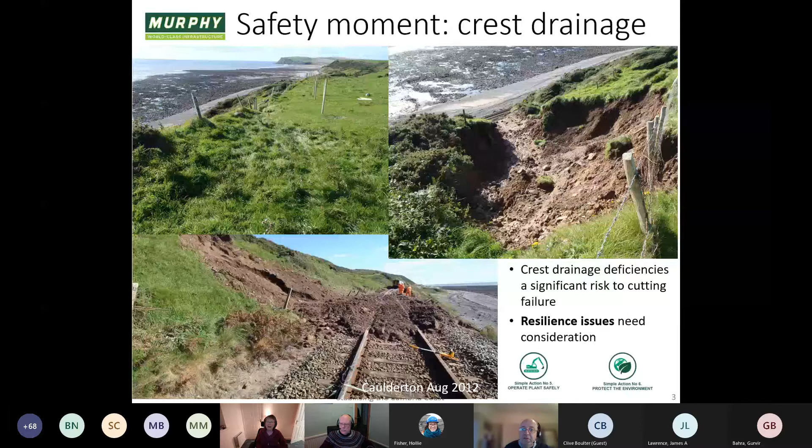So the Cumbria Coastline, as its name suggests, runs along the west coast of Cumbria. I actually live down here in Arnside, so I see the trains going past pretty much every day. It opened quite early in the history of railways, 1837. And the reason for that is because this area of the world is actually pretty remote, unsurprisingly, but it's remote even in Lake District terms. There aren't really any routes across the country that are substantial routes. So the only real route round this part of Cumbria is round the edge, so either by road or in those days by rail.

It was built primarily to support the industry at that time, so coal, iron ore, steel, chemicals, which were big industries. The port of Barrow was the largest exporter of iron ore for a long period of time in Victorian times, so it was a big industry. Obviously, that has declined significantly since then, though there are plans afoot to start coal mining again, with a lot of the coal working actually extended out under the sea. And then lately, there's been a nuclear industry at Sellafield, so the railway line is used for waste trains and also significantly for transporting workers from Barrow up to Sellafield, and likewise for transport for the nuclear shipyards.

Having two routes to get in and out of Sellafield and Barrow is strategic, and it's one of the reasons why the line is maintained, though obviously also to provide a link to what are otherwise quite remote parts of the world. There's only about 9 or 10 trains running a day from Carlisle to Barrow, with some going into intermediate stations, and consequently it's a single bi-directional line in parts. It was once twin track all the way, and it's pretty low speed, which helps in some ways for working on the railway, but there are many other challenges, as you can see.

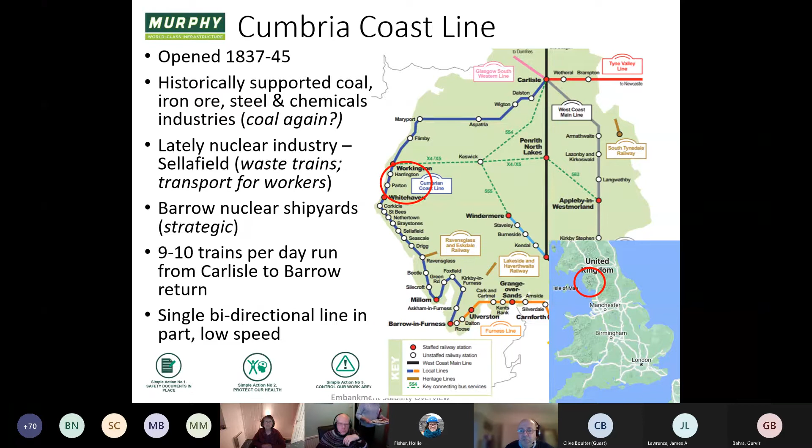So this area up here, Harrington Parton, is sort of the area which we're going to slightly concentrate on today. There have been works all the way along this line, and you'll see examples from other areas, but just bear in mind it's primarily that part of the world we're talking about.

So when you look at... can somebody mute themselves? There's a bit of cluttering around. Sorry.

When we look at the coast today, we can see that there is a legacy of past industry, but it isn't at all obvious. So if you look at the village of Parton down here, it doesn't look like an industrial area at all. In fact, this area here is a huge coal tip, but you wouldn't really know that when you look at it. And now there is the future of what's described as the energy coast, so you can see wind turbines and nuclear, obviously. But it remains its own place, and there are certainly very odd features about it that you don't see anywhere else.

So these houses, and there are several of them, lots of them, are literally built on the shore, and people live there. These aren't holiday homes, people are living there all year. And where this track is here, that is the route by which you drive to your property.

You have to have a 4-wheel drive. In fact, when we were there, somebody got stuck and we had to pull them out. So it's quite an unusual place.

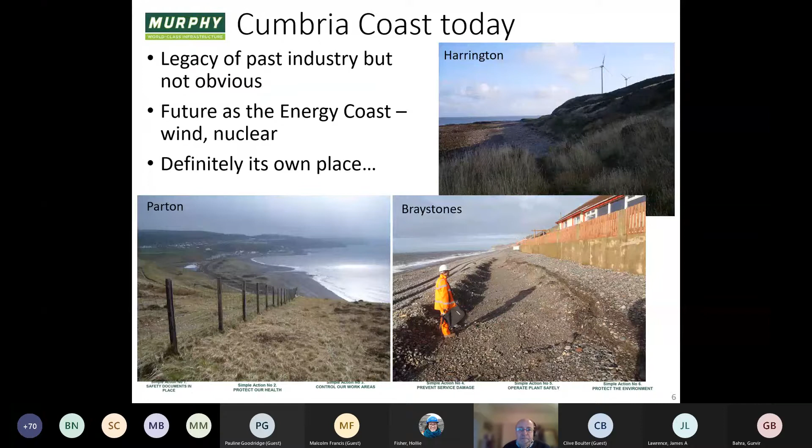As a consequence, there are lots of challenges. One of the obvious ones is nature. The Irish Sea is a very exposed coastline. You wouldn't necessarily think it—you think, well, it's not the North Sea, it's not the Atlantic, but it's incredibly exposed up there. These shots, when I was going through, it was quite difficult to find times when it wasn't pouring with rain, and the camera shots were smeared with water on the lens, etc.

Obviously I was going up there during times when the weather was poor because of emergency works. But these are all examples of things that happened in a single month—in a very short space of time, a big storm. We've got major collapses and damage to sea walls, washout events. This is actually a rock slope, but nevertheless, washout events affecting the line. You'll see examples further on where basically a seawall collapsed and took away the railway line.

This is an example of one of these houses we were talking about. I'd been speaking to the owners a few weeks before, talking about whether they were concerned about the fact that storms could come up and damage their property, and they had said, 'Oh no, it never happens, we've never had any issues with the weather.' Well, obviously that wasn't quite the case.

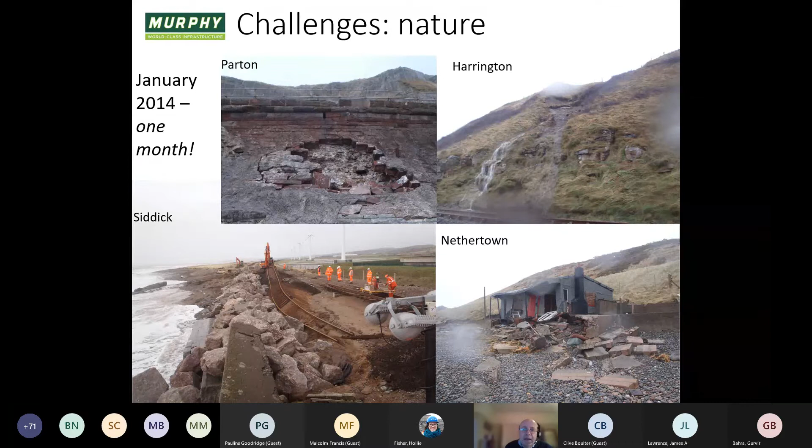Then there's the broader environmental issues. It's obviously an environmentally sensitive area. There are SSSIs, there are Ramsar sites, there are dunes, and consequently natterjack toads associated with those, and shore nesting birds. There are protected marine habitats, soft corals just in shallow depth, protected fisheries, and multiple consents with marine organisations to do any works on the foreshore. And there are multiple landowners, including the Crown.

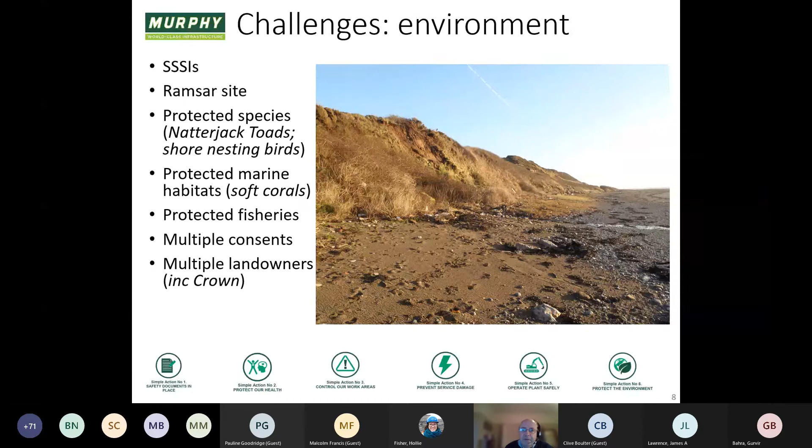So it's tricky to organise works from that perspective. The location itself is obviously pretty challenging. It's a railway environment, so as anyone who works on a railway knows, that's not easy to organise—there's lots of rules and regulations we have to follow for safe working. It's a foreshore environment, so there is tidal working. You can see some guys working there—this is a culvert job—and you've got to work around the tides and make sure you can work safely, which is tricky. It's very exposed, so when the weather gets bad, you literally can't work sometimes because of the amount of water and wind.

And it's remote. There is no practical road access to most places, so a lot of places you're either having to come along the line, or if you're lucky there might be an access track along the railway line, or you're coming along the foreshore. There are sea walls you've got to get over and deal with, and there are not necessarily good access points to the railway where you can get vehicles on and off. Signals are quite remote because they don't need many, in some cases bi-directional lines, and there's a lack of mobile coverage. So trying to organise yourself around all those is difficult.

And then there's the asset condition. The railway line, as you can see there, was built on the easiest place to build it, which was basically along the top of the foreshore at the bottom of these sea cliffs. It seemed like the best option at the time. And remember, like a lot of railway lines, it was built purely for economic purposes—it wasn't built to be there in 100 years' time, it was built to deal with the industrial needs of the time for the next 20, 30 years. And so it's a Victorian asset.

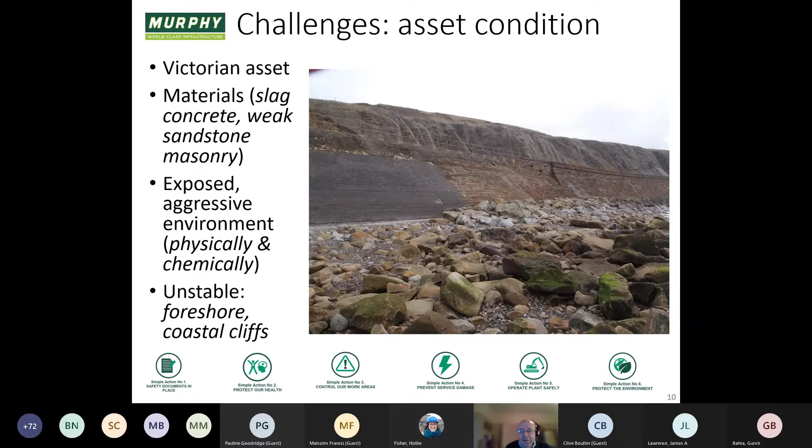The materials that make it aren't great. In places there is slag concrete, which means it's not very durable at all. The masonry, as we'll see later, is a weak sandstone. It's an exposed, very aggressive environment, physically and chemically, so that's not good for any kind of structure. And it's built on very unstable ground—foreshore environment, coastal cliffs—all tricky things, all affecting the asset condition. So just a few examples there.

We can see here, this is slag concrete on the seawall at Siddick, and this is the effect of having slag concrete. It's a storm, it came down, it's unreinforced, very poor condition, it collapsed, and then the railway line was exposed behind it.

A lot of the masonry, most of the masonry, is St Bees sandstone, which we'll talk about in a bit, which is a pretty weak sandstone. It's very convenient to use because it's easy to cut and shape, but it doesn't stand up to the battering of the sea. And as a consequence of that, and as a consequence of the Victorian sort of structure with this skin of masonry, it can easily collapse.

So small cracks, small voids open up. The force of water and the air associated with that being pumped in by the waves basically blows out the front of this masonry facing. So you get some quite dramatic damage to the seawalls, these Victorian seawalls.

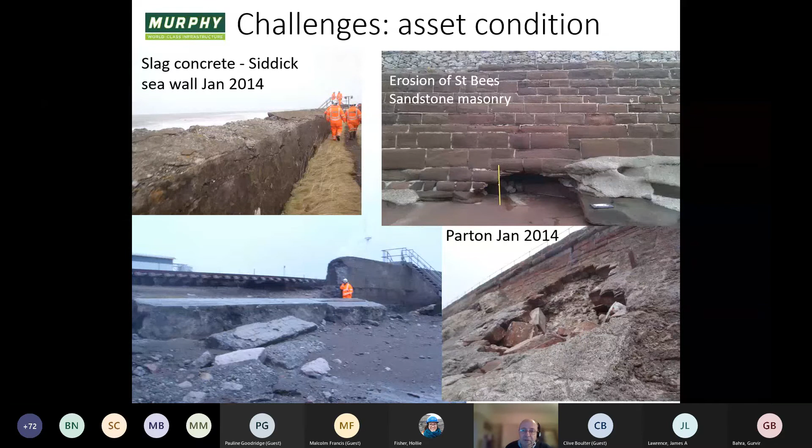So if we come on to the geology, I've chosen intentionally a pretty ye olde map of the geology, but the geology for this talk, for the purpose of this talk, is quite simple. The underlying geology along the coast is basically either coal measures material or St Bees sandstone, Permo-Triassic St Bees sandstone. And neither of those deposits are particularly competent, and that causes a lot of issues.

On top of that, you've got made ground of various types, so slag associated with the steel industry, the iron ore smelting industry, mine spoil, landfill deposits of various descriptions. Then you've got natural drift deposits of beach materials, blown sand, and then glacial deposits, which are basically till, a very sandy till, largely derived from the St Bees sandstone.

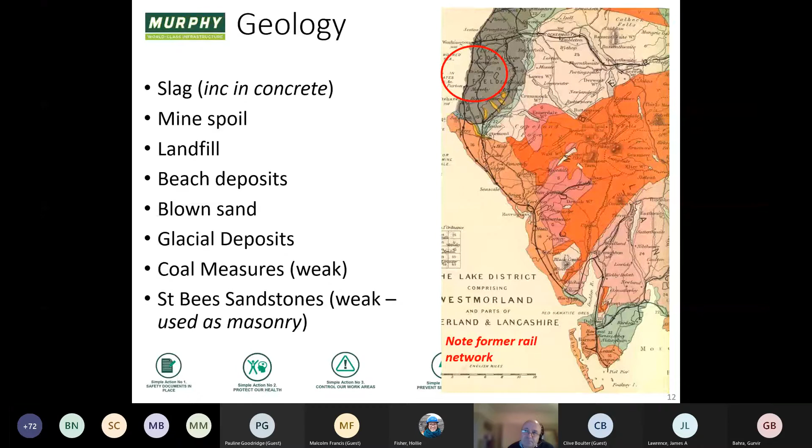Which doesn't help in terms of its ability to resist being washed out. So the coal measures material forms part of the wave cut platform. You can see dipping strata there. There are some quite nice fossils in it, incidentally, because you get some nice calamites fossils which you can see on the beach, plant fossils, which are quite fun to collect.

But from a slope stability point of view, it's not great, because you've either got blocks of sandstone, which can easily ravel out and roll out onto the track, and then you've got this weak, weathered mudstone behind it, which can either ravel off or come down as small translational failures, or sometimes there are deeper slope failures within that weak material.

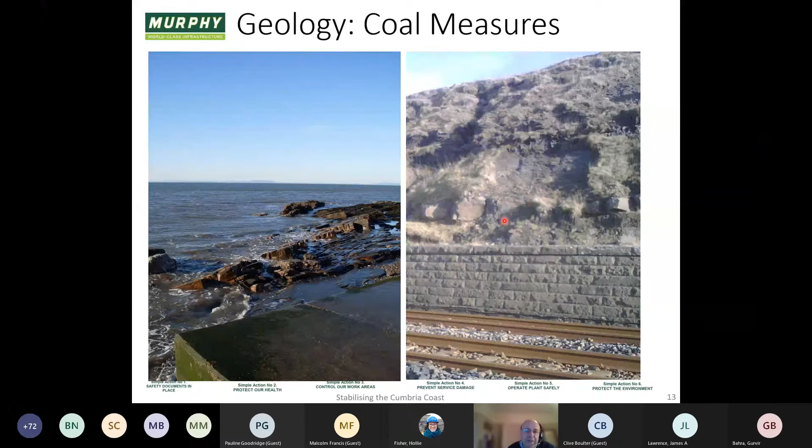And the glacial deposits, as I say, are very sandy. So this sort of sandy till is typical, often very red, like the St Bees sandstone, and these are all washouts where it's been exposed onto the sea cliffs by the foreshore. So again, not a great material from a stability point of view.

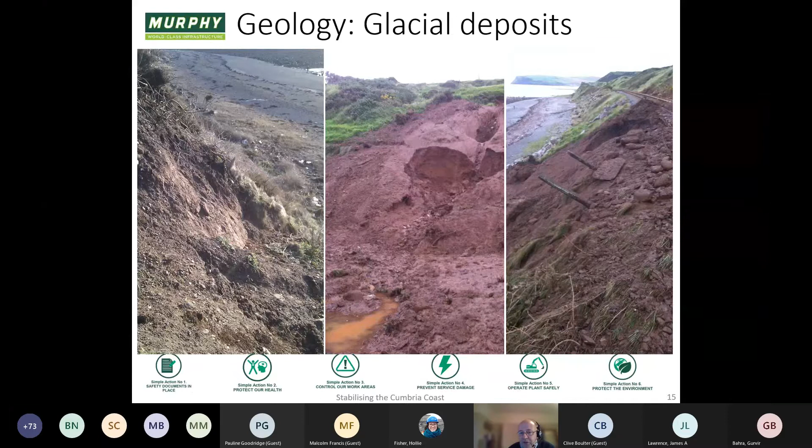And then in terms of made ground, we've got typically landfill type deposits. So this is part of this coal tip, you can't really tell, but the whole of this is a landfill, and you can see this ochreous layer here, and there's some nasty ochreous seepages coming out of that. And then over on this side at Harrington, this is actually a cliff of slag. In Victorian times, it was quite common to simply tip the slag out into the sea and form these cliffs of slag, which at a distance look like rock, like limestone, but in fact are significant deposits of slag with all the problems associated with that.

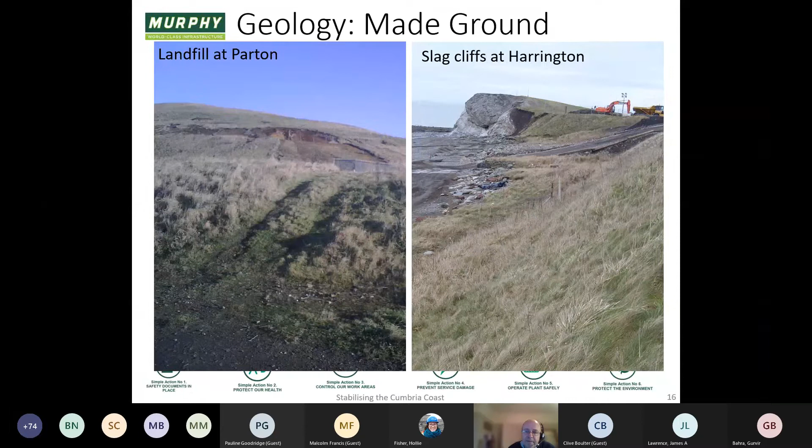In terms of the geomorphology, it's pretty much as you might expect. So in the front, there's a wave cut platform. There are then beach deposits of sand, shingle and cobbles. Then there are areas of dunes and blown sand, and behind that there are sea cliffs, like you can see here, sort of Pleistocene to recent deposits, usually of this sandy glacial till.

Within those sea cliffs there are deep and shallow failures, including failures which occur within the weak rock, ranging from recent times to geological age, fairly significant failures.

So again, this is the Caulderton slip, which I started off looking at. This is the area where water had come down, washed out right along the foreshore, and took away the support underneath the railway line.

This train was stuck, having realised what was going on ahead. Another train was brought in to try and rescue the passengers, and that got stuck in another landslide. That kind of situation was quite common. I almost got stuck myself once going down to look at one of these sites, and then was unable to get out and drive back out of where I'd come down.

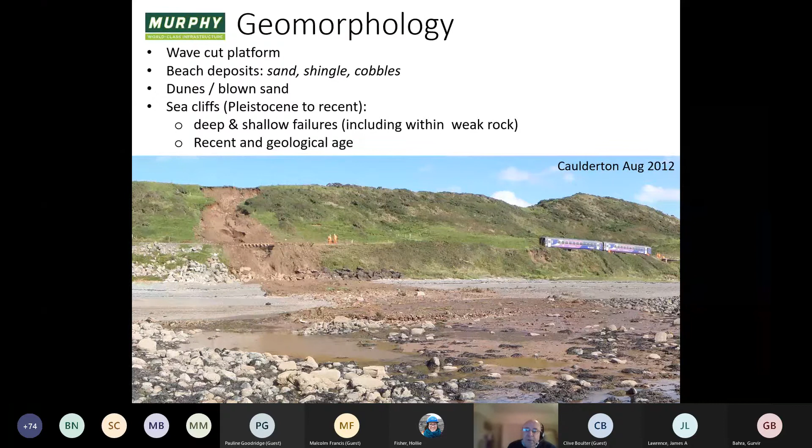There was so much water and so much coming onto the road. It's a tricky part of the world when it gets bad.

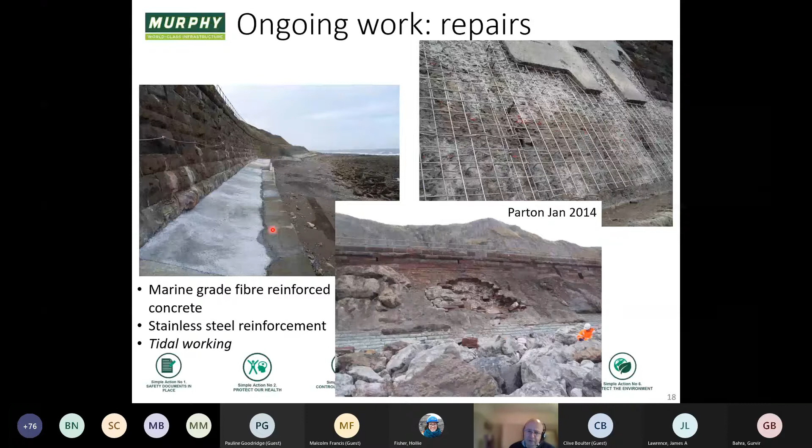Tricky to do because you've got tidal working to consider, so you can put this material down, and if you're unlucky the tide comes in and washes some of it away, so it's not easy to do. This is quite an example of the kind of repairs that have to be done from time to time.

Where possible, a better alternative is often to put down rock armour, because unlike a sea wall, it's going to absorb the energy of the waves as they hit it, and it's more maintainable in many ways, because even if individual rocks become dislodged, you can put them back in place again.

It's quite a skilled thing to do, although it might not seem like it. You start off by putting down a heavy duty filter underneath it, so that prevents stuff from being washed out underneath the rock. But then you need quite a skilled machine operator to form this profile.

This isn't just rocks piled up, which you often see. It's actually forming quite a relatively even profile for the size of the blocks, and that's quite important. They're interlocked together in a way that they're not going to come out from one another, and that requires skilled operators, and the guys working up there are very good at doing that.

There's a practical size of block, really, which is about 6 tons, which is pretty much all you can move. So whilst the size of the blocks is determined by the wave energy, in reality, 6 tons is about all you can ever put down. You just can't physically get it there and place it in these remote situations.

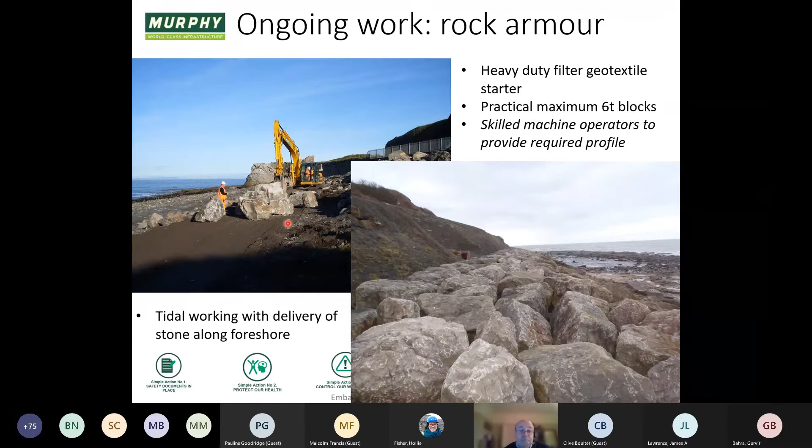And you've got to work on it tidally. You've got to move the stuff along the foreshore, as you can see there, and it's quite tricky. So again, it takes a long time and requires much more skill than you think.

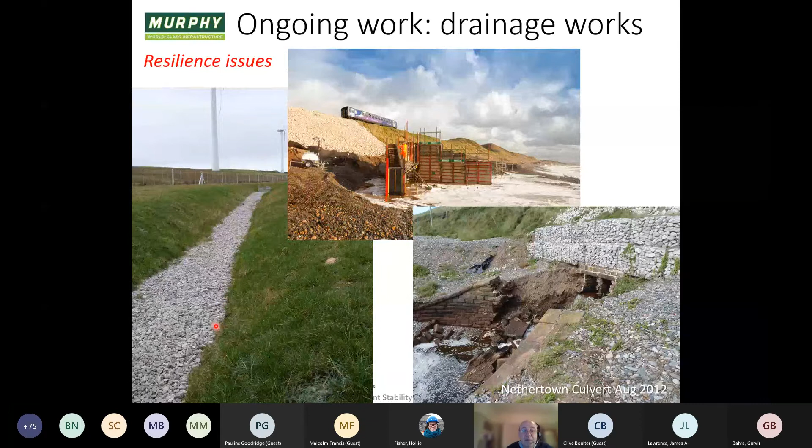And then there's a lot of drainage work. So we talked about this as resilience issues, trying to look at ways in which you can put in overflows or ditches like this, which are going to capture material which overwhelms the drain beneath, to make things more resilient to the extreme events that we're getting.

Stabilization works generally often comprise emergency works, really just to patch up the slopes with a suitable robust material. Up in that part of the world, this 6G, 6B material, a coarse rock fill material, is fairly easy to obtain. It's a good solution because it doesn't require compaction, and it's much more resistant to being washed out from rainfall events. So there's a lot of rock fill repairs.

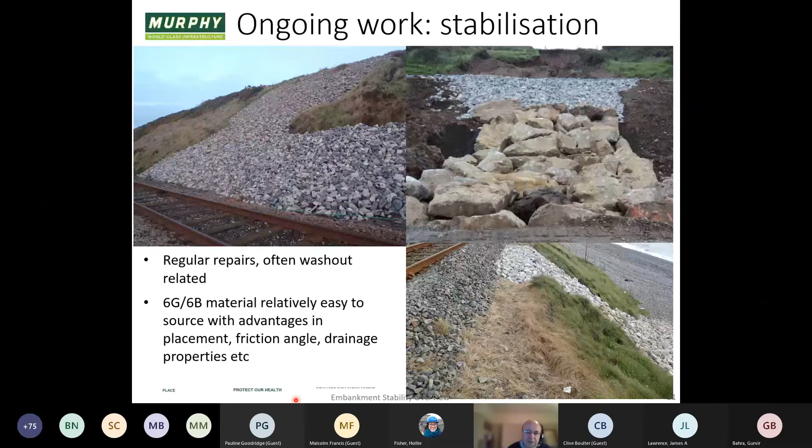So let's just talk about some of the specific jobs that we talked about, Parton, and then go on to the sleeper graveyard.

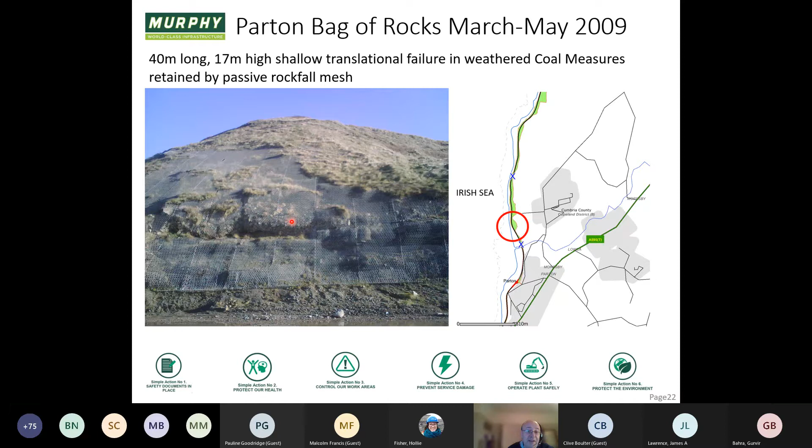This was a site which was stabilised in 2009. It was a 40-metre long, 17-metre high, shallow translational failure in weathered coal measures, and it had been retained up until that point by passive rockfall mesh, the Maccaferri mesh that you see all the time on rock slopes. Except, of course, the material coming down wasn't really just rock; it was weathered rock, soil, etc. It had been there for a while, and it had now built up into quite a tricky situation. You can see it's bulging, and it wasn't clear how that material could be released in order to prevent the whole thing from coming down.

So it got its name because if you look at it here, somebody decided that it looked like an enormous paunch in a string vest, and they described it as a bag of rocks. It looked like, as it says, a bag of rocks, which is quite interesting.

It shows the capacity of this old style hexa mesh, Maccaferri type mesh. It's carrying a lot of material, and you would think if you were designing this, well, that's great, I can allow for enormous blocks to be supported in it. But you have to remember that material built up over a long period of time, and it's quite small in size, so the energy of each of those tiny bits and pieces coming down into it was quite low. That's the reason it was able to accumulate in that way. If that amount of material came down in one go, particularly if it was in a big sharp block, it would just cut through the mesh and have collapsed onto the line. But fortunately, that hadn't happened.

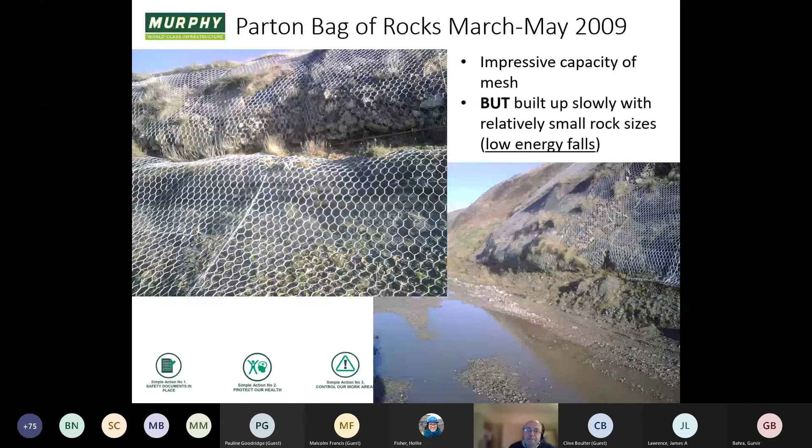But there was a tricky task, as you can see there. We needed to remove this material and then install a better solution behind it. Obviously, if we'd simply gone along and cut along the bottom of that mesh, for example, or cut one of the retaining wires, there was a possibility the whole thing would come down right on top of whoever was working beneath. So there was a lot of scratching of heads as to how we were going to do this. We had a design, but the design assumed we'd be able to remove this material.

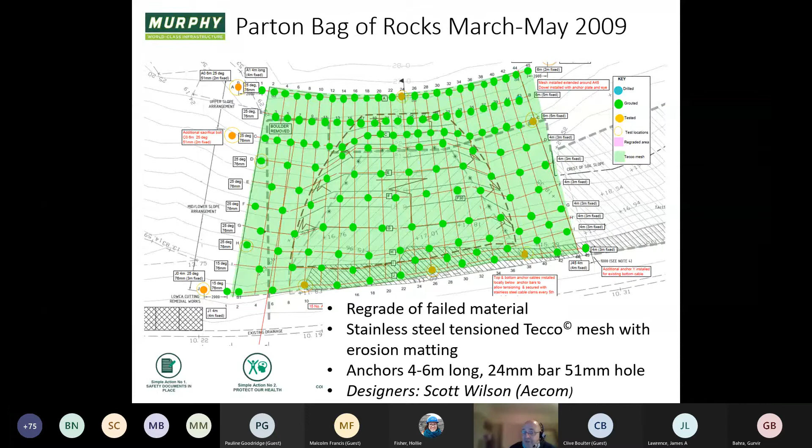The solution was going to be to replace all of this with a system designed to deal with these shallow translational failures that were going on. That was to use this tension Tecco mesh, Geobrugg Tecco mesh, with an erosion matting between it and a whole series of anchors 4 to 6 metres long, which would then be tensioned into it and hopefully retain the shallow soil and prevent this material from moving in that way again. That was a scheme designed by Scott Wilson, now AECOM. All had to be stainless steel, obviously, because we're dealing with this very aggressive marine environment.

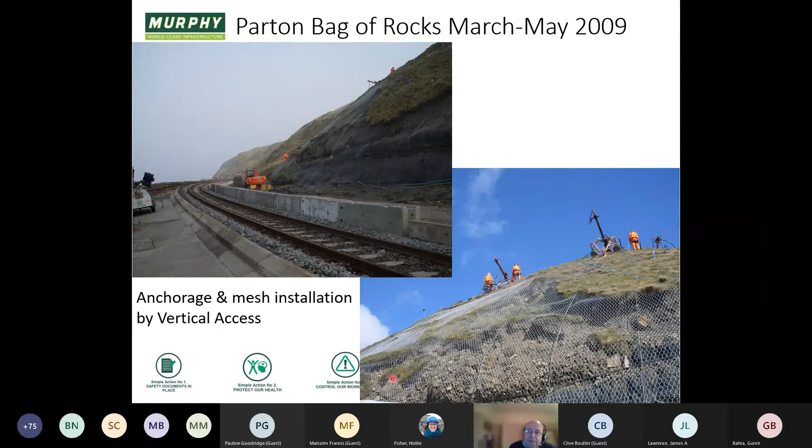That was fine. But then we had to think about how we were going to remove the material in order to put that in place. So this is the stainless steel Tecco mesh. It's like a chain link type mesh if you haven't seen it before. This was the first time it had been used in stainless. It was quite expensive, very expensive, and had to be ordered specially.

There were some advantages because unlike the Macaferri type mesh, when you trim it, you can actually weave sections back in again. You can sort of thread through one section of wire to join two together, which is obviously what we did because it was very expensive. So there were some advantages in securing it together, and it has a quite neat system. It uses little links that you can use to connect it together.

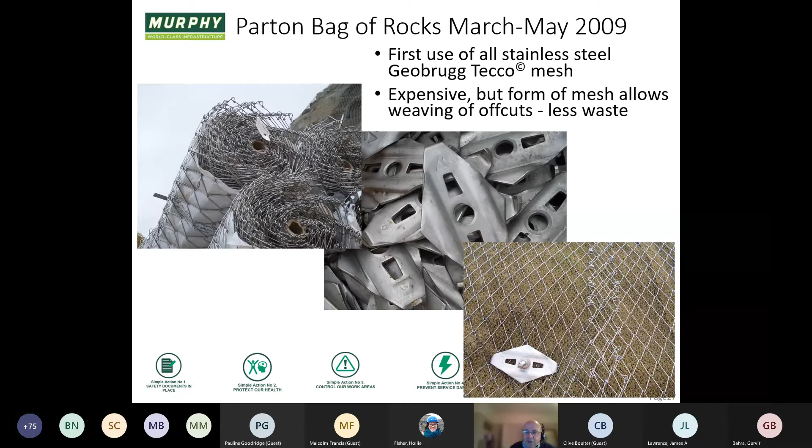It was good in many ways, but it's much stiffer than Macaferri mesh, so it was a bit more tricky. What we had to do was take off sections of the old mesh, regrade the face, and then install the new mesh.

You can see working at night with a demolition machine at the bottom, a long reach machine with a reinforced cab, nobody at the bottom of course. The guys on ropes were coming down, cutting the mesh at a safe point above it, and then the machine was pulling the mesh off and raking the material down.

As you can imagine, the first time we did this, we imagined it would just go ping and suddenly all fall down to the bottom. Everybody was waiting for this to happen. But in fact, when we cut the mesh, it had welded itself together—it was so clayey, it just formed a hard lump, and we had to scrape it down. Just as well, but we prepared for the fact that it could all come tumbling down.

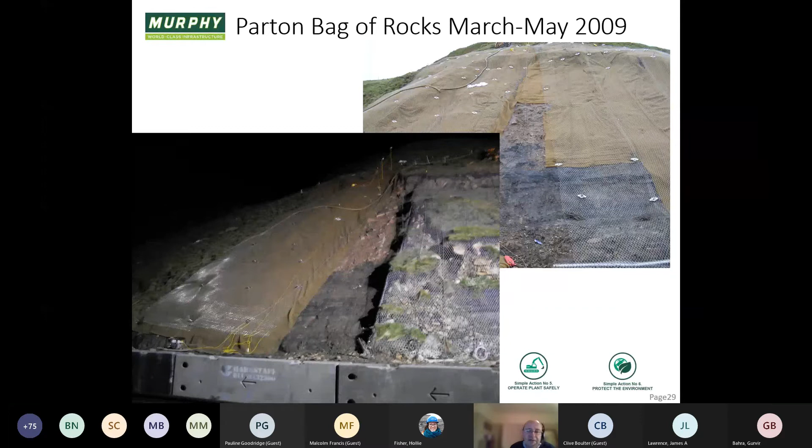So we had a process of cutting and regrading this material. Here you can see a section that's been regraded, and then a section where during the day we were installing the anchorages, putting in this mesh, and underneath it this sort of browny green erosion matting. We worked our way progressively over the site—at night doing the regrading work, during the day putting in the anchorages and the mesh.

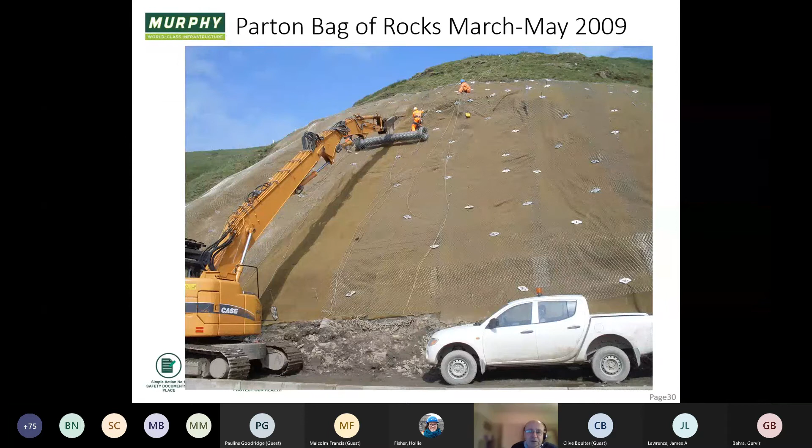There was like a wheel axle which they were using to unroll the mesh down on the end of this long reach, which was quite neat, and that worked quite well because, as I say, it's stiff material, quite heavy, so it was difficult to handle from that point of view, but that worked quite well.

And then that was the finished slope. This is the area that's all been regraded off. Underneath here you can see the weathered mudstone beneath it, and quite a neat and tidy job.

So the second site I want to talk about is the famous sleeper graveyard. Sadly, this is no more. It was one of those places that if you worked on the Cumbria coastline, everybody knew about the sleeper graveyard.

Because it's a remote part of the world, and because it was difficult to ship materials in and out, it had been decided at one stage that it might be a good idea to tip all the old concrete sleepers over the edge of the railway line, getting rid of them and also providing a bit of a sea defence—bearing in mind what you can see here is actually the end of an enormous slope failure, which I'll illustrate shortly. But unfortunately, it's not a stable arrangement. It was obviously moving and subject to attack from the waves.

So the plan was to come in and replace this with a much more robust sea defence, rock armour, but tricky because, as I said at the time, it's a bit like the old game Jack Straws, where you had to pull out straws from a pile of material without causing the whole thing to collapse—because how would we do this without destabilizing the slope above, or having all these sleepers come tumbling down on top of this?

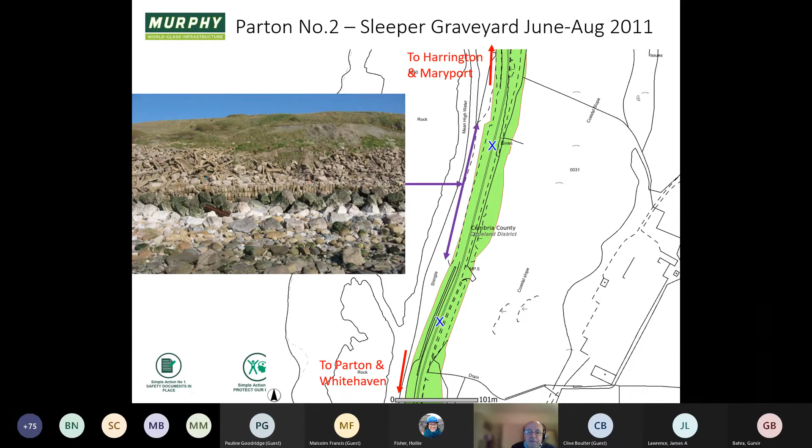This is an area just north of Parton, Bag o' Rocks, just south of Harrington really. There was a line of sleepers up front which provided a sort of toe, and they piled up all these sleepers behind, with the railway line running on top, and this slope behind was all moving.

The concern was that removing or shoring up the front end of that toe of the feature would cause it to move even further and destabilize. There wasn't any practical opportunity to stabilize this feature—it was too enormous.

Somebody's gone off mute, I think.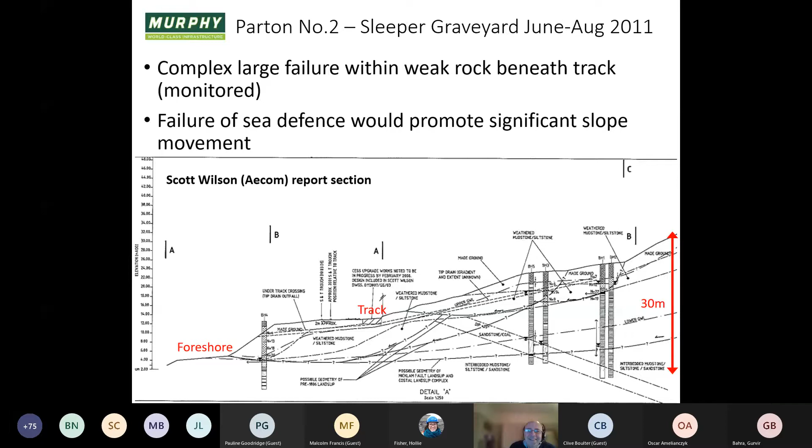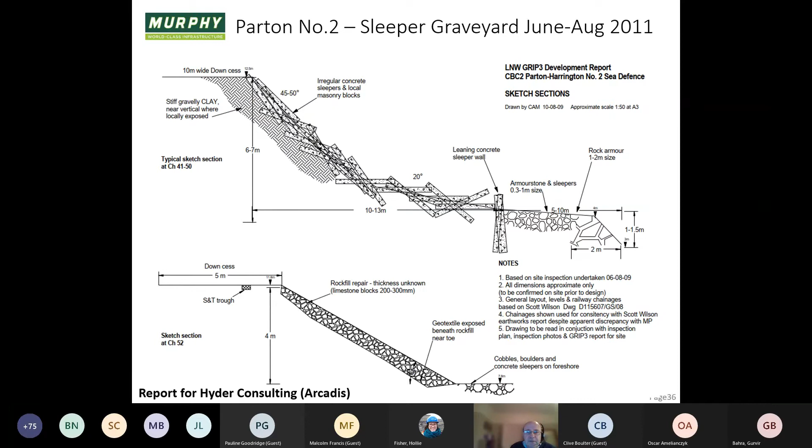This is just a section - that was a section by Aecom who'd done the original work on this. This was some work that I did for Hyder and Arcadis, looking at the feasibility, and that's just the profile showing that there was some area of rock armour, then this big pile of sleepers, and then up onto the track. This is the track running through here, and this is the slope behind here.

This is the lobe of rock armour and sleepers we were talking about trying to remove. It had to be done quite carefully and sequentially - we had to remove the sleepers progressively and then progressively put in place a rock armour toe. The rock armour was 3 ton to 5.5 ton stone, so again just below the 6 ton limit I was talking about before. Then the embankment immediately above that was regraded.

Now all of that had to be done tidally. You can see there's some working being done at night because we had to work with the tides, and the tides aren't just during the day, obviously. So we were trying to get as many shifts in as we can during the period.

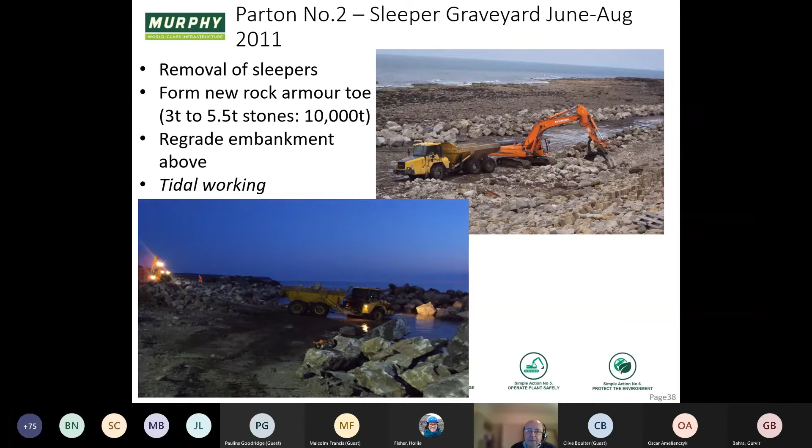And that's the completed rock armour, replacing all the nasty sleepers, so much more stable. Remember, this is an area of public access, so big piles of loose, unstable sleepers weren't great from that point of view. You can see here the thick filter material underneath, to prevent the material behind being washed out.

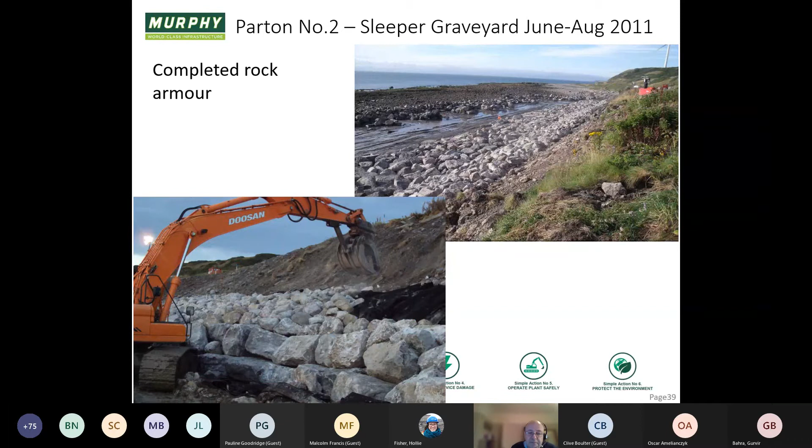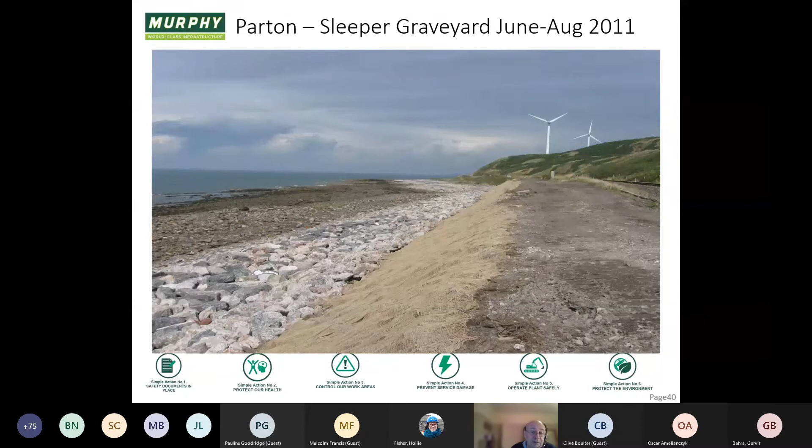And then that's the finished embankment above - this is geojute material to be seeded. There's the track, and this is the rock armour there to replace all the sleepers. So a nice job, much better to look at, much more stable from the railway's point of view, and much better from a public access point of view, bearing in mind it's a surprisingly used area by local fishermen and others. It's odd how many people actually go there from the local area.

Finally, just to say that this is work that Murphy is still involved in. This is after my time - I wasn't involved in it - but it was a job done in 2019 that won an award from CECA, the Civil Engineering Contractors Association.

You can see all the features we've been talking about. Firstly, we've got the wind farms on top of the slope - this is the future, and obviously a concern for the stability of the slope. You can see there's an overflow mechanism - there's a flume here intended to deal with any overwhelming of the crest drainage. There's crest drainage behind, and counterforts to drain the slope.

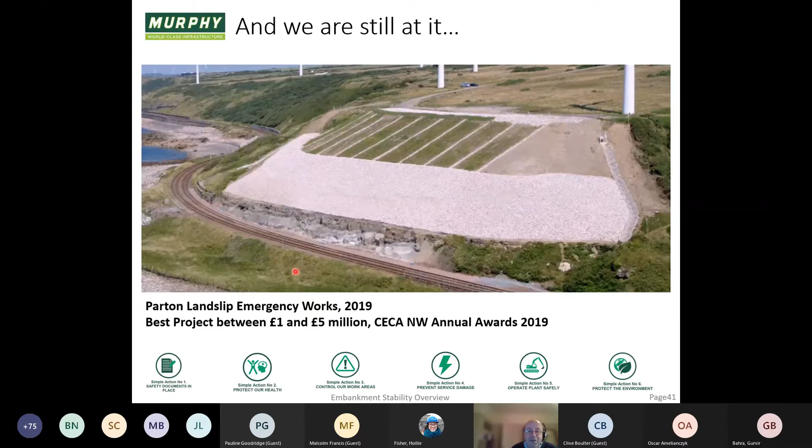There's a big area of rock fill to drain the bottom and support the bottom of the slope, and you can see here there's actually a rock slope at the bottom which has got spray concrete on it. So you've got the full range of things that tend to be done to the slopes in that neck of the woods - it's a perpetual job, a bit like painting the Forth Bridge. It will go on forever and ever, and it certainly is an experience to work up there - if you have worked up there, you don't forget it.

So before we get to questions, just to run through a few acknowledgements. First of all, to acknowledge the Murphy construction teams involved in that. My involvement was very much on the design and only to a certain extent on supervision, and there are some very skilled people who worked on that, both planning and undertaking the works, who need to get the credit for that - too many to call out.

But also it was done very much as part of a team, both with designers like we talked about - Aecom and Arcadis and JBA - but also subcontractors like Vertical Access and Network Rail's RAM team and project team. So very much the success in all those jobs was the team involvement.

And finally, just to give a bit of a shout out to my partner in crime in those days when I was working as a consultant up there, John Rigby Jones, who was involved in a lot of those jobs with me. So just to give him a bit of credit for that.

And then really over to you. I'm happy to chew over any questions. I suspect that if it's very technically geological, I probably can't give you an answer. And likewise, my memory might fade on some of the details, but I shall answer as best I can any questions you have. Thanks very much.

Right, thanks Holly, bye now. Thank you, cheers Chris, thank you. Bye now, thank you Chris. Thank you. Thank you. Thanks a lot, Chris.